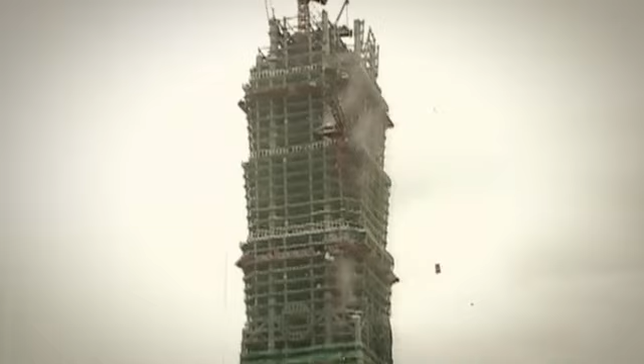This is Taipei 101. Taiwan's record-breaking skyscraper. Incredibly, it's 1/3 taller than the Empire State Building, and cost $1.75 billion to build. But Taipei 101 not only stands in a typhoon hotspot, but right beside an active earthquake fault line. It couldn't exist without the surprising engineering connections hidden deep within its design.

A racing yacht. I can't believe the speed of this thing. A birdcage. That didn't last long at all. A steam pump. A safety belt. And a sports car. So, what's all that got to do with one of the world's tallest buildings? We're about to find out.

I'm on a journey to explore some of the inspirations behind Taiwan's extraordinary skyscraper. In 2004, Taipei 101 topped the record books, reaching 509 meters. Everything to do with Taipei 101 is big. Very, very big, whichever way you look at it. But what made modern skyscrapers like Taipei 101 possible? Bizarrely, inspiration is thought to have come from a birdcage.

Less than 5 generations ago, skyscrapers like these weren't possible. Engineers feared really tall wood and masonry structures would collapse under their own weight. So the question is, who thought of making buildings with metal frames, and why?

Rewind to Chicago, 1871. The city is on fire. The inferno rages for 36 hours, killing over 300 people and destroying 17,500 buildings. The ruins reveal the cause. 3 months of drought turn the timber buildings into tinder boxes. As a result, the city bans wood construction. But Chicago continues to grow fast. And with land at a premium, architects search for new ways to build tall.

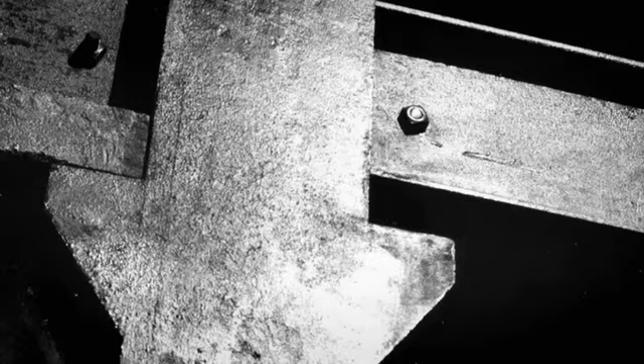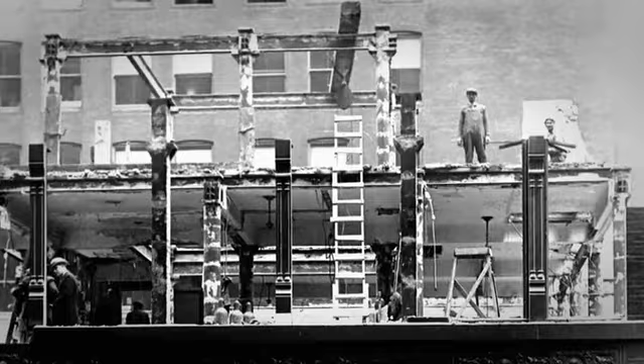Today, it may seem like any bird brain could come up with the idea of building with metal frames, but Jenney's innovation was inspired. He realized that if he bolted horizontal beams to the upright columns and transferred the dead weight of the walls to a metal framework, he'd create not only a lighter structure, but one strong enough to support multiple stories, one on top of another. I want to see for myself the kind of forces that a cage braced with beams can withstand.

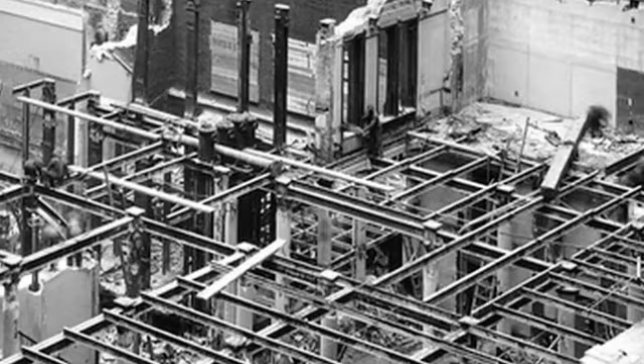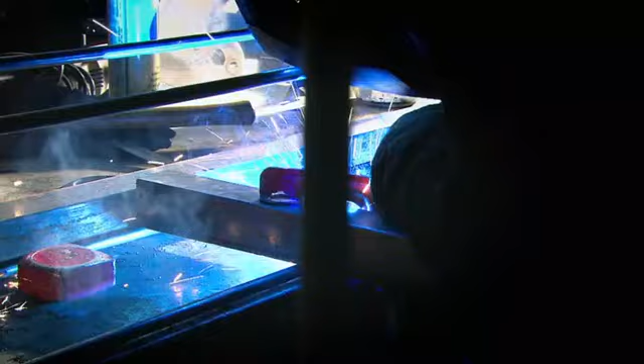So I need some cages that I can test. In order to find out just what a brainwave LeBaron Jenney's idea was, I've come to a workshop that has, amongst other things, a 25-ton crusher on hand. Say these represent LeBaron Jenney's columns. What I want to do is see how much vertical load they can take. That's weight to you and me. First without, and then with bracing.

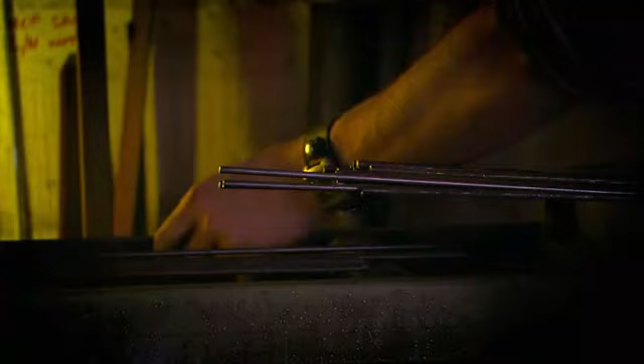Structural engineer Brenda Marsh has set up an experiment to find out how much downforce it'll take to crush my metal towers. So, Brenda, I know this is all about sort of bracing or beams, but how are we going to show that? How's it going to work? Yeah, what we're going to do is take this sample here that has some columns with no beams in it whatsoever, and we're gonna stick it in a press over there until it breaks.

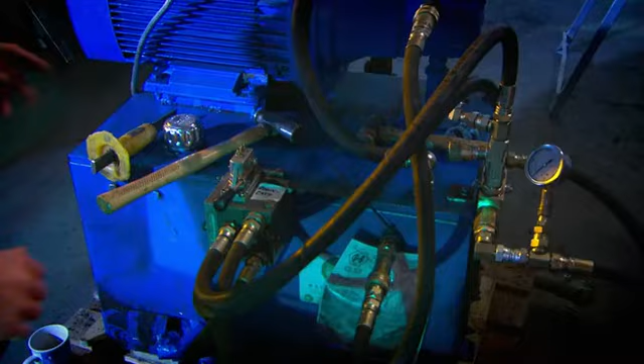What am I doing? You're gonna operate the machine. OK, that's a mistake. Right, I'll do that. You better put that in the business end of it. Okay. So I need to lift the ram thing up. Apparently it's this lever. Okay, now what I want you to do, Richard, is lower the plate down a little bit. Don't apply the pressure yet. There you go. Okay, stop. We need to put some safety goggles on. Oh, OK. Of course we do. Make sure we're at a safe distance. That'll protect us. Right, so here comes your vertical loading. Okay. Applying it now.

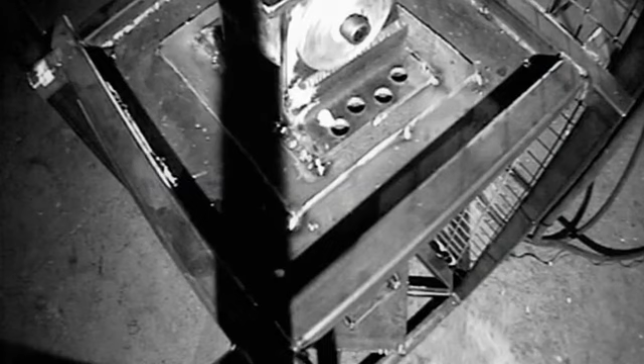The crusher can exert 23 tons of downward force, the weight of a locomotive. Oh, there we go. Hang on, you can see it's going. The columns are starting to buckle. There we go. The whole thing's starting to sway now. You can see. It's completely... Fantastic. Look at that. And that's gone. That didn't last long at all. Almost immediately, the tower gives way. And that's it. It's failed.

This is what worried the early engineers, a structure like a skyscraper collapsing under its own weight. That would be bad in a building, wouldn't it? That would be very bad. We design buildings so they don't do that. OK. Right. We're all set to do that again? Yes.

With structure number 2. Now, this is the new one. I can see, yes, it's got more bits on it, but what are the key points? What makes it so special? Right. What we've done on this one is we've taken what we had in the original structure, so that's these 4 columns, and we've added in some beams here.

The original structure, when it failed, the columns tended to bend outward. So what we want to do is hold those in place to stiffen up the columns. So that means they're all 4 working together then, effectively, rather than bending and bowing. Yes. OK. We've got extra bits on as well. What are these bits?

What we've done is in an original building, you would have walls or something else that keep everything in place. So we're simulating that in this structure with the cross bracing. OK, so for the purposes of this experiment, then, this is the important bit, these beams across here. Can Jenny's tiny horizontal beams help the tower withstand any greater downforce?

The crusher piles on the pressure. It's just like adding multiple stories to a tower as you build taller and taller. 25. That's going. Oh, there we go. Started to buckle. I've broken your clever one. You have done. But it did a lot better. I mean, it was 2.5 times stronger.

And that's exactly what we wanted to show, is that you brace off the columns and it can take a whole lot more load. Can I say something, though? Because instinct tells me now, tie it together, it'll work. Why? Well, it's obvious now because we've seen it. It happens all the time. But before anyone ever thought of it, it's not the obvious solution.

Using his inspired idea, LeBaron Jenney builds the first modern skyscraper. The Chicago Home Insurance Building, completed in 1885, supports its entire 10 stories on a metal frame. So, thanks to a bird cage and some smart thinking, the great-great-grandfather of this monster tower was born. That's how the structural engineers could build this and all its record-breaking 101 floors. But it's more remarkable than just scale.

This giant stands right beside an earthquake fault line and in one of the world's most active typhoon zones. Not an ideal spot for a megatower. Taipei 101 is the world's tallest building under such extreme threat from tropical storms and seismic activity. So how do you build a structure that can cope with wild winds and earthquakes? And what's that got to do with bamboo and sailboats?

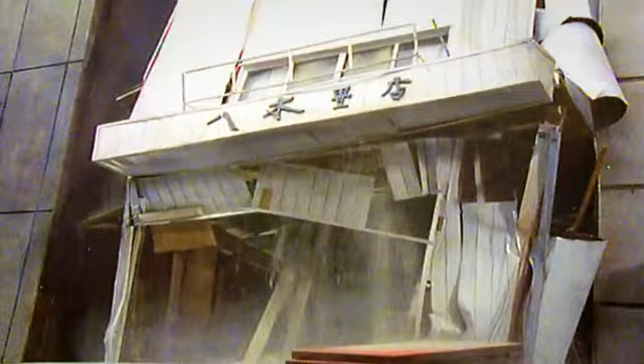Building a 101-story skyscraper on the same fault line should be a recipe for disaster. The designers have to find a solution. Tests in earthquake simulators reveal that a building must be strong and yet flexible to avoid collapse in a quake. This is the contradiction that Taipei 101's engineers must overcome.

When you build one of the tallest structures in the world in the middle of a notorious earthquake hotspot, how do you make it strong enough to stay standing, but flexible enough to withstand the potentially disastrous effects of a seismic shock? The award-winning Taiwanese architect of Taipei 101, C.P. Wang, found inspiration for his solution in nature. Specifically, his nation's long-standing connections with bamboo.

Well, CP, what can possibly be the connection between an immense structure like Taipei 101 and bamboo? I mean, it's not made of bamboo, is it? No, it's not made of bamboo, of course, but in a lot of ways, it's like bamboo. How? I think bamboo is a plant that doesn't look very strong, but it has this elastic nature. It may bend a little bit, but it doesn't break.

Bamboo is a giant, fast-growing grass. The secret of its strength and flexibility is its internal shape. Bamboo grows in hollow, jointed sections, like a series of solid-ended tubes. These are separated by partitions that help reinforce the stem.

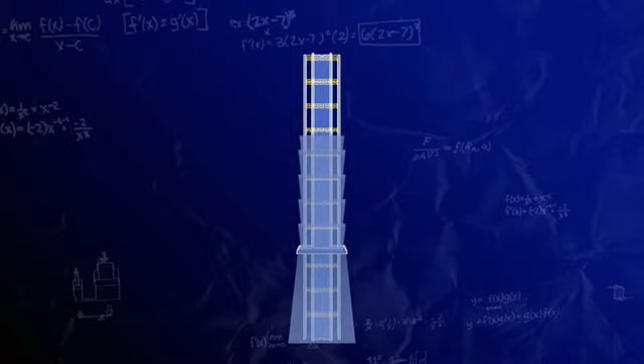Inspired by nature's solution, Wang designs giant steel trusses to connect across the columns at every 8th floor on Taipei 101. This bamboo-inspired design must meet strict seismic targets. The owners required Taipei 101 to withstand the most powerful earthquake expected to hit the city within a 2,500-year cycle. But nature tests C.P. Wang's design even before it's complete.

In 2002, an earthquake strikes. Shockwaves tear across the island. Taipei 101 shakes violently. Anything not firmly attached crashes to the streets below. Dislodged construction cranes tragically take 5 lives. But Taipei 101 stands firm and construction resumes. 2 years later, the completed megatower is crowned the world's tallest building.

But by designing a structure to withstand quakes, Wang creates a new challenge. Tall buildings sway in high winds and even risk collapse in extreme storms. And Taipei 101 is no exception. In fact, it's not just windy, it's smack bang in the middle of a typhoon hotspot. Typhoons, Asian hurricanes, can batter Taiwan 3 or 4 times a year. In 2007, 160-kilometer winds kill 9 and cause $100 million of destruction.

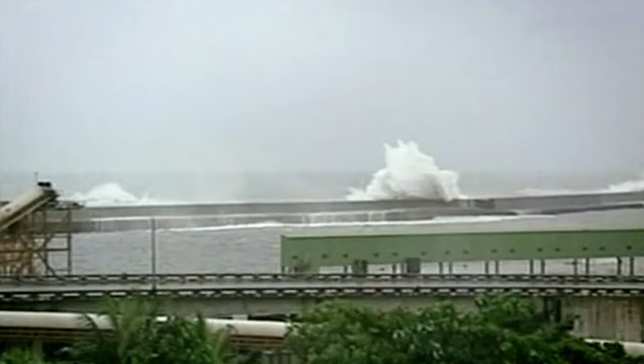To keep Taipei 101 standing in a superstorm, C.P. Wang turns to an engineering solution developed 3,500 years ago. To discover this ancient engineering secret, I'm meeting Ken Maschke from the company that helped design Taipei 101. Ken wants me to try sailing, but not in an ordinary sailboat.

Ken. Hey, Richard. Hi, how you doing? Come on board.

It's narrow, light, and has no keel sticking down into the water for stability. So how can it stay upright against the wind? This extra hull, one of two, is the engineering connection this craft shares with Taipei 101, and why Ken's got me on a sailboat. Now it's got me working. These clever devices are called outriggers. There it goes. They keep a sailboat stable in high winds. Look at that.

Before we hoist sail, Ken explains the basic principle of the outriggers. If you stand with your feet together and I shove on you, you're likely to fall over. If you spread your legs, it's going to be a lot tougher. Now, the same thing, in essence, is what we've done here. We spread out the distance between which the force acts. The idea of outriggers goes back 3,500 years to the Polynesians. Using them meant the early mariners could paddle or sail fast and stay stable.

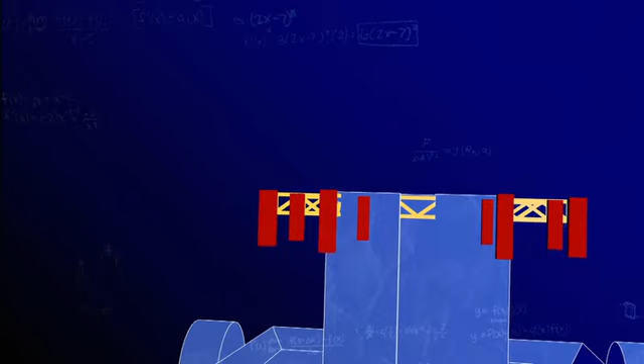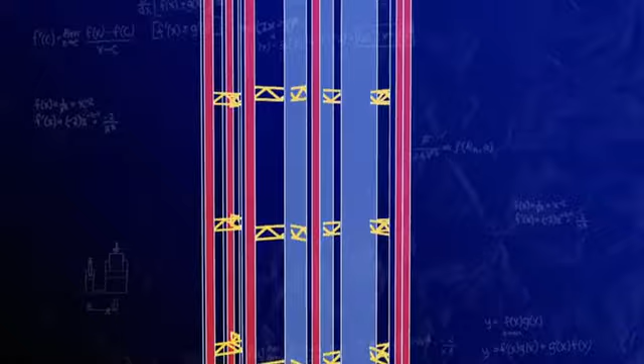I can see how these outriggers work on a boat, but the same theory on a building. How? The outriggers are part of the wind-resisting system, which includes a central core that's very stiff, but not stiff enough by itself. So we add these outrigger trusses to transfer force out to the exterior columns, like the pontoon that you're standing on right now. We can take the outrigger idea and apply it all the way up the building. So actually in Taipei 101, we have outriggers every 8 floors.

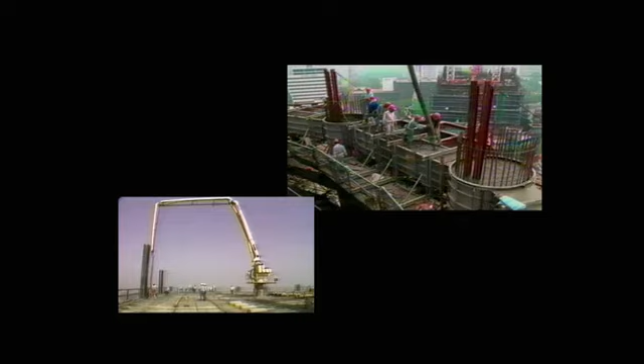With a building as big as Taipei 101, every structural challenge is supersized, especially when working with the construction world's favorite material, concrete. Every floor on Taipei 101, including the 101st, is concrete. To pump concrete that high requires a super pump that has its origins in the 18th century.

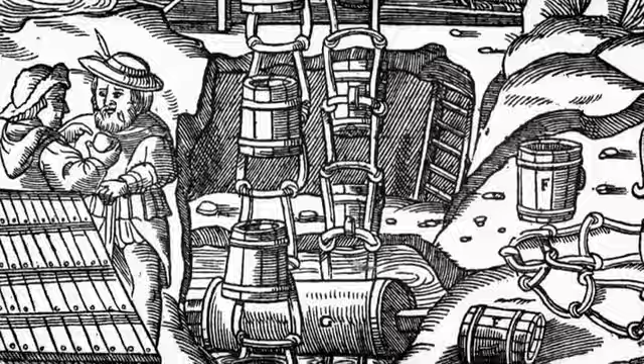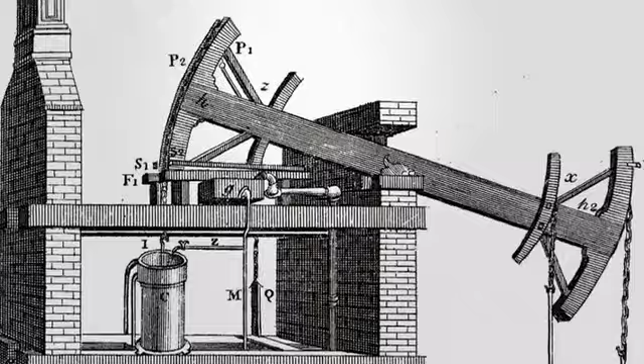Rewind 300 years. The English mining industry is in trouble. The deep mines are flooding, and the man and horse-powered pumps available can't drain water fast enough. The mines are going under. Inside this modest building sits the machine that saved the day and kicked off the Industrial Revolution. It is the result of a stroke of genius from an inventive preacher and ironmonger, Thomas Newcomen.

This is Newcomen's Nodding Donkey, the first piston-powered pump, and the first really practical engine for pumping water. Newcomen's idea was to harness the power of the pressure difference created by a vacuum. He used it to move a piston. It works on the vacuum created by the steam when it's condensed. It works on the principle that steam occupies, say, this much space, but when you cool it and turn it back to water, it occupies a fraction of that space.

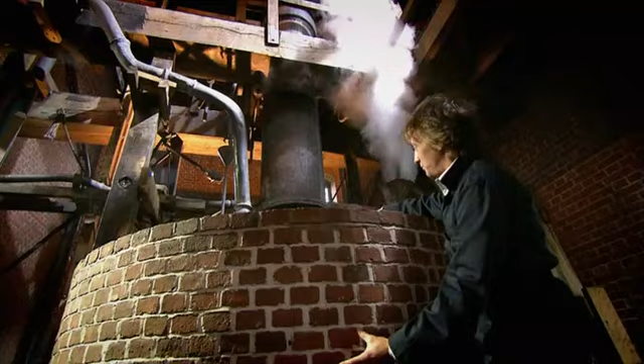So under here is the water, the tank, and under that is the heat. Heating it up in the boiler as steam up into that big cylinder, which is the piston. That pipe goes in to the bottom of the piston, sends the cold water in, that condenses the steam, and suddenly that huge volume of steam is reduced to just a tiny volume of water.

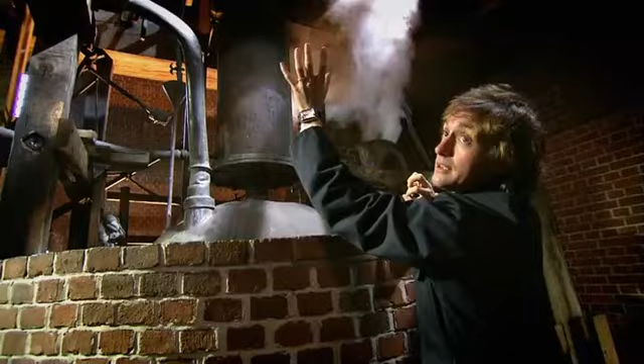And then atmospheric pressure outside on top of the piston is greater than the pressure inside, and it's got no choice. The piston has to come down, drawing the beam that way to do its work. Then it's counterbalanced, so it just pulls the piston back up to the top. More steam in, condenses it again, draws it back down. They were very clever.

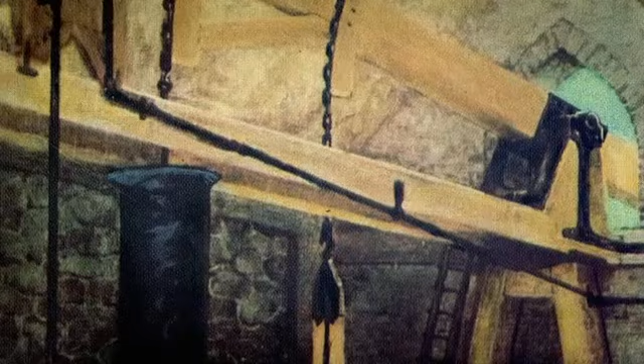Throughout the rest of the 18th century, Newcomen's invention drains countless mines, helping fuel the Industrial Revolution. 24 years after his death, in 1753, the first Newcomen-style pump crosses the Atlantic to begin draining a copper mine in New Jersey.

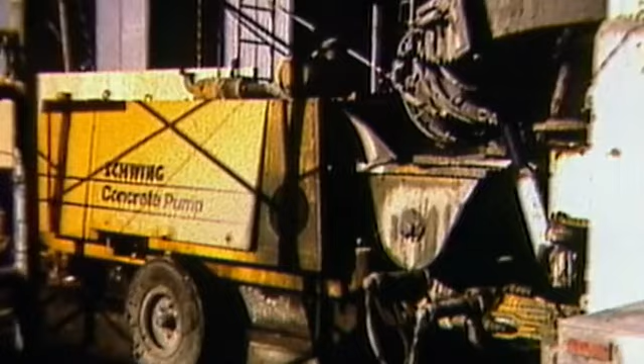Fast forward 2.5 centuries to the offspring of Newcomen's engine. These powerful piston pumps use a vacuum and mega pressures to deliver concrete skyward and into the record books. In August 2003, a world record was broken, just up there. It was the highest anyone had ever pumped concrete on a building. It had to be raised 101 floors from down there. A pipe filled with concrete this high weighs well over 13 tons, and pumping it takes technology Newcomen could only dream about.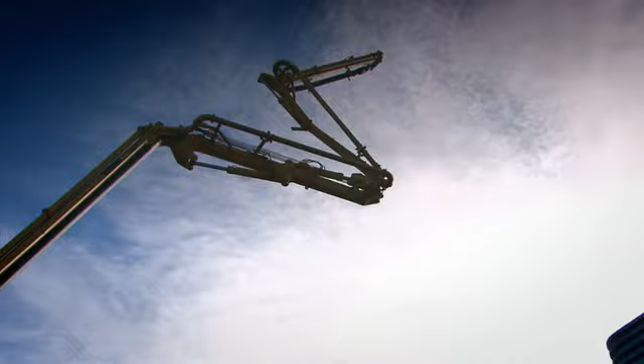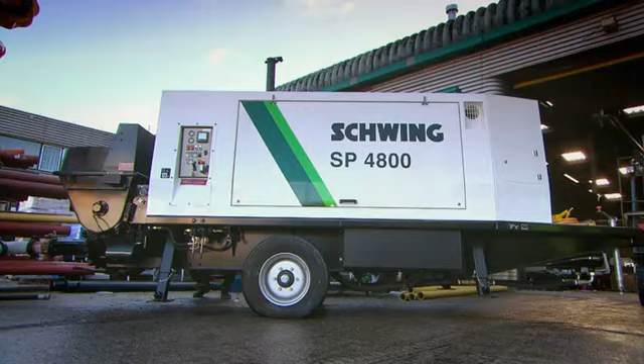Pumping concrete is big business, and as buildings get higher, the technology to power it to the top gets more sophisticated. This is the business end of a pipe network that extended over 440 meters that way. A chain of interconnected pipes stretch to reach the high floors. On Taipei 101, the pump sits near the base of the building, and the rooftop lies 4.5 football fields above. The concrete is kept flowing by a super pump.

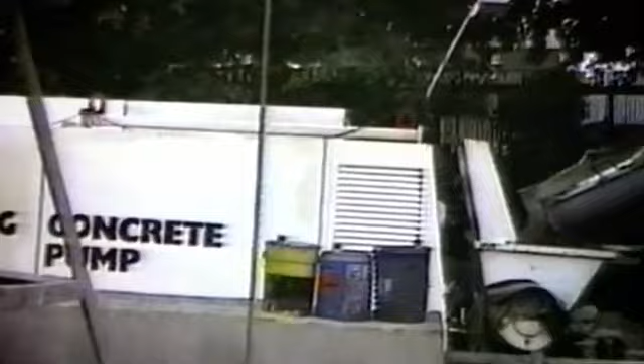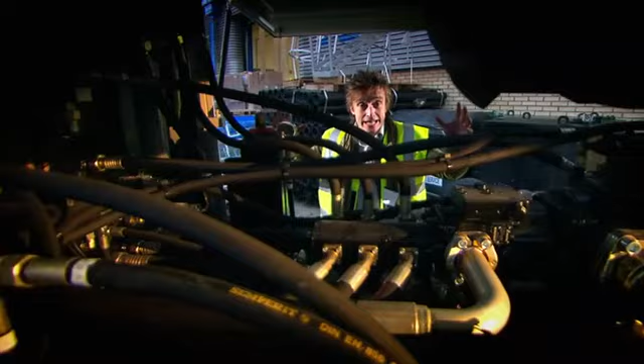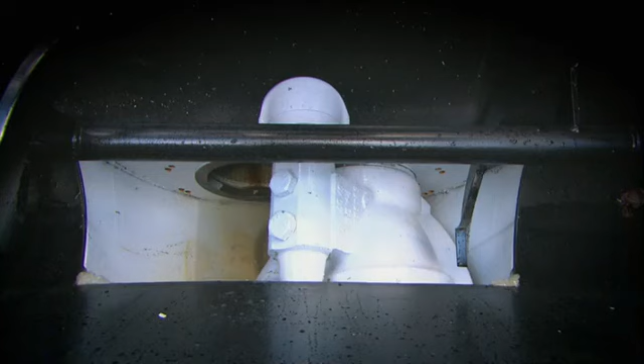Meet the 12-cylinder, 419-kilowatt Deutz diesel engine. This is the heart of the operation. Literally, it's the pump that keeps the construction alive. The moving parts in here made it possible to pump the concrete even to the highest floors. A column of concrete must be kept flowing, or the mix will separate, or even worse, set. To keep a constant flow, the pump operates 2 pistons. One sucks while the other blows.

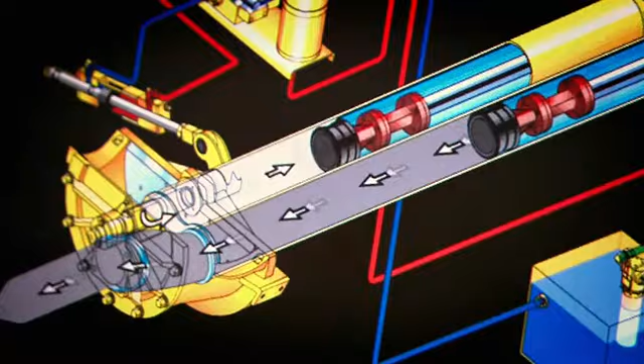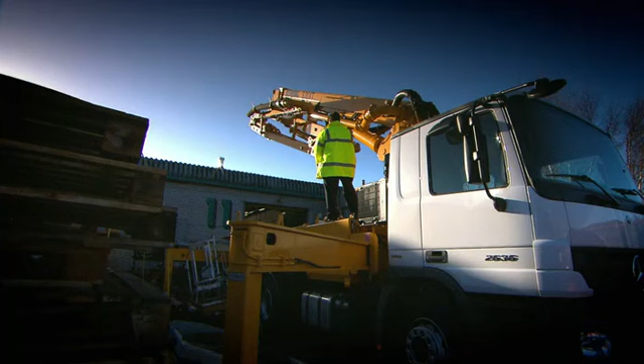A simple vacuum, like Newcomen's, pulls the liquid concrete in. Then the huge diesel engine generates hydraulic pressure to push it out. It's Newcomen's ideas, just hundreds of times more pressure for a much weightier task. I want to see what kind of pressures the Taipei 101 pumping world record used. So pump specialist Phil Suri devises a pressure demo that will blast my weight in concrete.

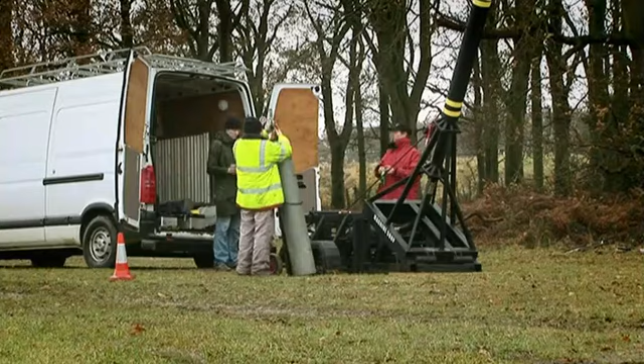It's difficult to get your head around the kind of power and pressure that modern pumps can generate using those old techniques. So rather than just talk numbers about it all, we've come up with a rather clever way of demonstrating very graphically what that power can do. We're going to use pressure to move some concrete, but we're going to do it in a rather different way. Using a concrete missile as heavy as me, Phil and his team are going to demonstrate what 100 bar of pressure can do.

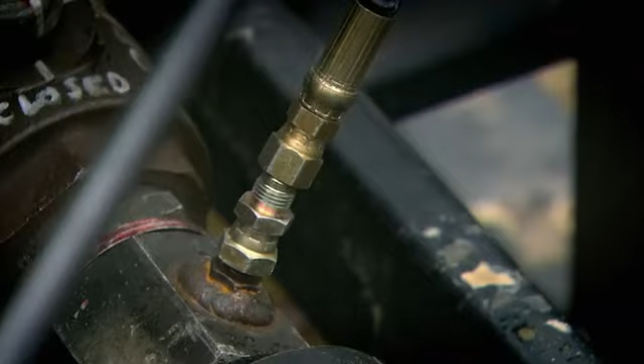1 bar, named after the Greek word for weight, is about 1 kilogram per square centimetre, or roughly the atmospheric pressure all around us. I pump my car tyres to 3 times that, 3 bar, and that seems like a lot. It's a firing cable.

Huh? That's a cable to fire it. That's a trigger. Right. That's what I said. You trip over it. Oh, sorry. I'm sorry.

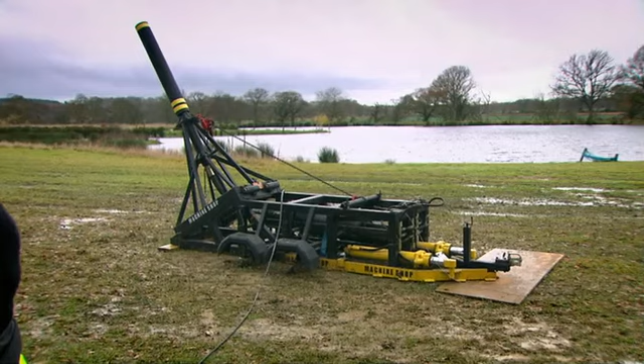But this will give me an idea of what? Of what 100 bar of force is capable of doing. Taipei Tower, the pump that we used there was capable of 200 bar pumping pressure. This is only capable of 100 bar. So your pumps can generate roughly twice the pressure of this. Yeah.

Exactly. And you're just telling me that because you're proud of your pump. Yes, I am. Yes, you are. I am.

This is a first for me, obviously. I've never seen a chunk of concrete my weight fired from a cannon. Phil is keen to see how far his concrete missile will go.

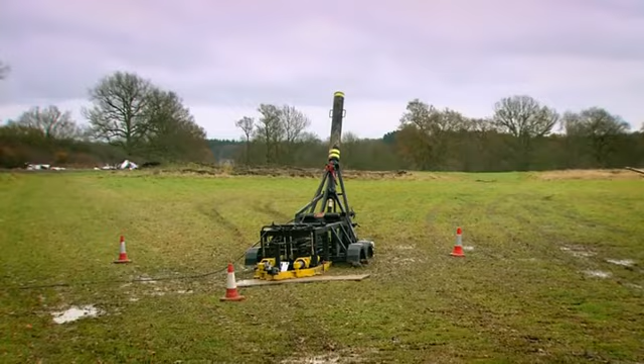The safety team are keen to make sure no one is on the receiving end. Wow. So that's half the pressure on a lump of concrete the same weight as me. Yep. You're what, about 140 pounds? Yeah, 64 kilos, something like that. Okay, like 10 stone, okay. We've got to go and get that thing then. Yeah, let's do it. Crikey.

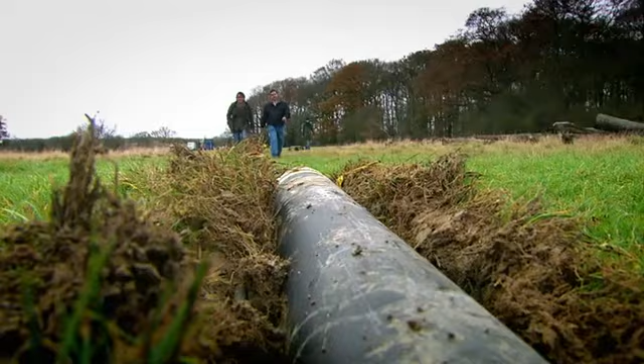The launcher blasts my concrete twin well over 90 meters. The top of Taipei 101 is 4 times that distance, straight up. And the record-breaking concrete column was 220 times heavier than me. I now understand the amazing pressures Phil's pumps achieve, sending concrete to the 101st floor of the Taipei Tower. It's buried itself. It's buried itself, yeah. It's quite impressive, look at it. 106 paces.

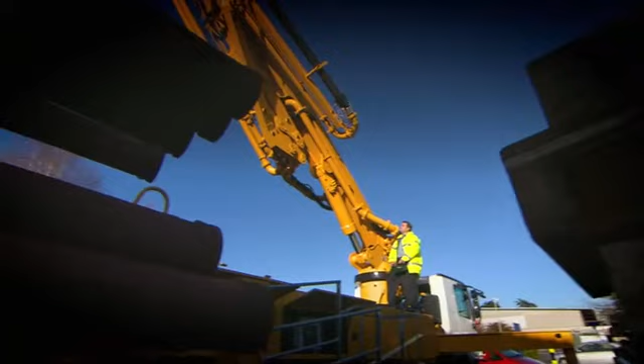The mechanical pump has come a long way from Newcomen's wheezing steam engine. That's how they got concrete to the top. But how do you transport people to such heights safely and quickly? Which brings me to elevators and my next connection.

Whatever type of transport you're using, including elevators, there's a problem with going faster. You've got to be able to stop faster too. Higher speeds mean more braking loads. More loads mean more heat. So how do you provide a braking system that can work without overheating and risking a fire? And what's that got to do with a sports car?

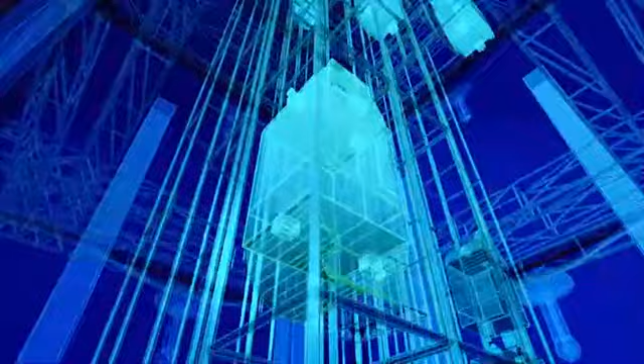Being big and tall like Taipei 101 means lots of elevators. In total, 67 elevators are needed to keep the 10,000 people that Taipei 101 is designed for on the move. 34 are even double-deckers. But for tourists wanting a flying visit to the sky-high viewing gallery, these regular elevators aren't fast enough. The challenge is whisking a visitor like me directly to the 89th floor, super quick, but super safe.

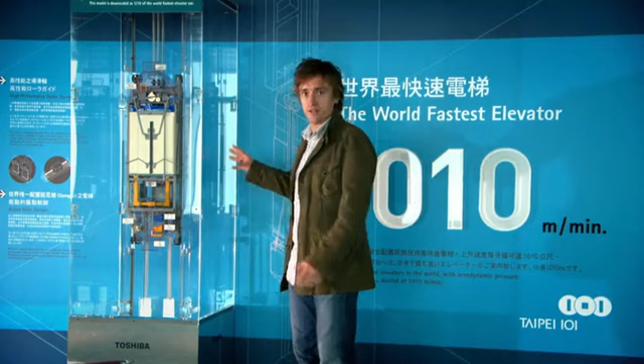This is the answer. The world's most technologically advanced elevator. Well, obviously this is a model. The real thing's bigger, so you can get in it. Digitally controlled, it has a pressurized aerodynamic capsule with shake reduction and even earthquake sensing. The designers say it also goes really fast. I want to know how fast.

This elevator, one of a pair, has been officially certified by the Guinness Book of World Records as the fastest elevator in the world. And they've given it to me to play with. So, they reckon it can do the next 84 floors in 37 seconds. Ellie, when you're ready, if you would, thank you. In your own time, go. As soon as we start moving, I'll start the clock. Go. I think we've started moving. There's no noise.

There's a fan. Apparently the whole lift is pressurized like an aircraft to help stop your ears from popping. Talking of aircraft, this actually accelerates vertically more rapidly than a commercial passenger airliner taking off. And my ears are now popping. Right, we're 20 seconds in, 25. There's no sense that we're going faster than the city speed limit. We're breaking the speed limit. If we did this horizontally through the streets, we'd be in trouble. There's no noise. And that's it. That was under 37 seconds, and this is the top.

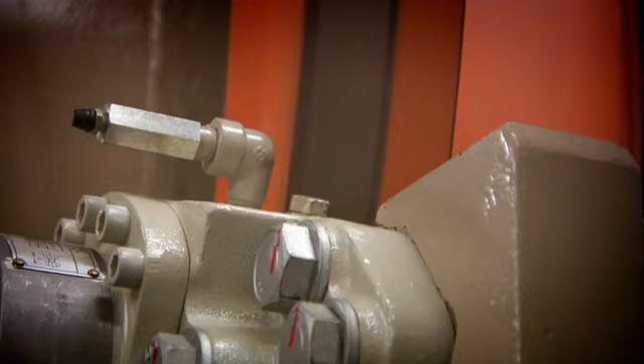The high-speed elevator launched me at over 60 kilometers an hour, almost half a kilometer into the sky. It's a long way up and a frighteningly long way down. If the elevator cables give way, it's an 84-floor drop with only the emergency brakes between you and the basement. In extreme events like this, metal brakes overheat and can fail. To hold Taipei 101's super elevators, the engineers needed a material that performs consistently, even when things get seriously hot. It's an engineering line of thought that owes a lot to the automotive industry.

This is a high-performance Porsche Boxster S and my next connection. Porsche was one of the first car companies to experiment with alternatives to metal brake discs. The material that performed consistently at extreme temperatures was ceramic. Their tests report the ceramic disc brakes don't get as hot as metal and can even grip better the hotter they get. I want to check out the difference in performance between metal and ceramic brake discs for myself.

So I'm meeting Craig Dawson, a motorsport engineering expert. So, Craig, what are you doing? Well, basically, I'm trying to get a benchmark for both the disc temperatures at the moment on the two cars. These two cars are completely identical in every way, apart from the brakes. That's correct. The yellow car has a traditional cast iron disc, like every modern-day road car. The red car has what is known as a ceramic disc.

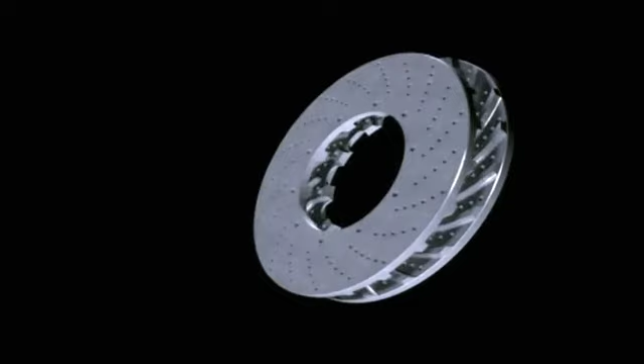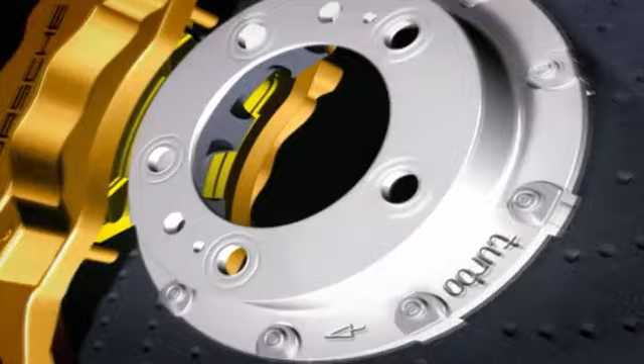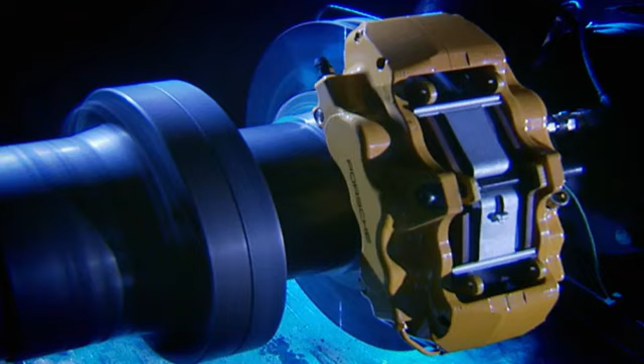The ceramic compound that makes up these brake discs is usually silicon carbide or silicon nitride. It's baked at extremely high temperatures to form a heat-resistant material. Why is heat such an issue in brake discs? Well, with a cast iron disc, it can get to the point where it gets too hot. It begins to not work as well. The friction that it actually produces goes down. So the pads can't grip as well on the disc and it doesn't work as well once there's too much heat. That's absolutely right.

And there's double trouble when metal brakes overheat. Not only do they stop gripping as well, but if they fail to dissipate the heat, they can set fire to what's around them, as this very extreme example from the world of motor racing shows. We have flames! Not good for emergency brakes in an out-of-control elevator.

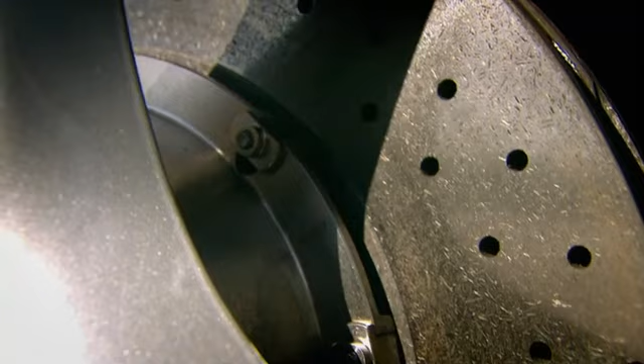Almost the opposite applies with the ceramic brakes. It needs heat to get them to work in the first place, but they can go to a higher temperature as well. So how are we, with just these two cars, going to show all of that? Well, basically, you're going to perform a series of repeated stops, which are going to build the brake temperature up. Here I go. 5 laps. The first test, drive very fast, then hard on the brakes 20 times over 5 laps. Reckon I can manage that.

The idea is to build up the brake temperature so I can feel if their performance changes as the heat increases. To gauge the temperature, we're using a camera that turns heat into visible light. The reds are hotter than the blue colours. White means it's getting serious. Craig also wants to see how quickly they lose their heat. A lack of heat loss is what can build catastrophic temperatures in metal discs. I can smell brakes. I don't know if that's good scientifically.

627. OK. When I pull in, Craig immediately checks the surface temperature of each brake disc. The readings on the front discs are well over 600 degrees centigrade. They're still functional, but as hot as the inside of a jet engine. 290. Craig will take a further series of readings to check the rate of cooling. Thinking back, the brakes did begin to feel different once they'd got very hot, but still perfectly safe.

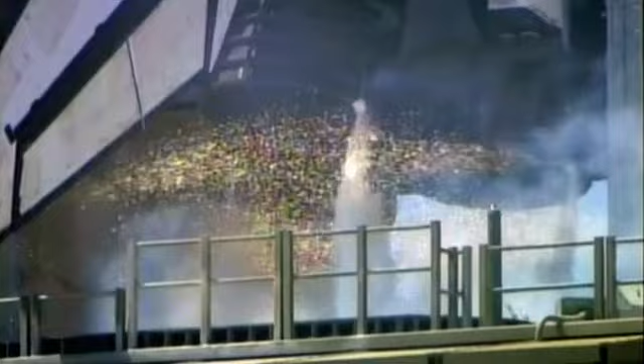This concept of using fireproof and heat-resistant ceramics for vehicles took off last century. Rewind to 1981. The first flight of NASA's shuttle is the culmination of a decade of research into heat-resistant materials. The problem is protecting the craft from re-entry temperatures capable of melting the aluminium body.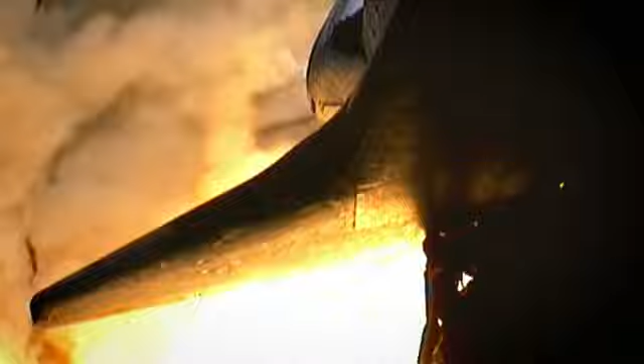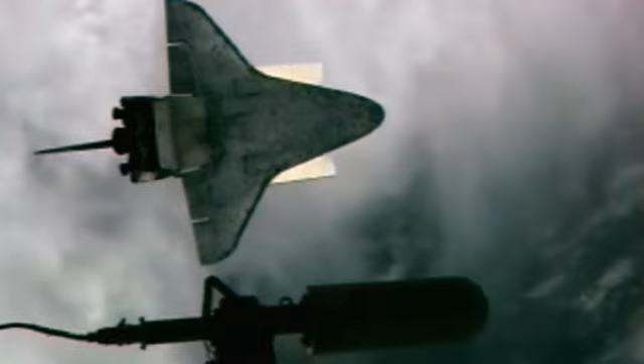Using a compound based on sand, aerospace engineers Lockheed Martin develop a new silica ceramic insulation. This forms the basis of the shuttle's heat tiles. A ceramic tile can heat to over 648 degrees centigrade on one side and stay cool enough to touch on the other. In really extreme situations, the tiles can withstand temperatures of over 1600 degrees centigrade. That's hot enough to melt rock.

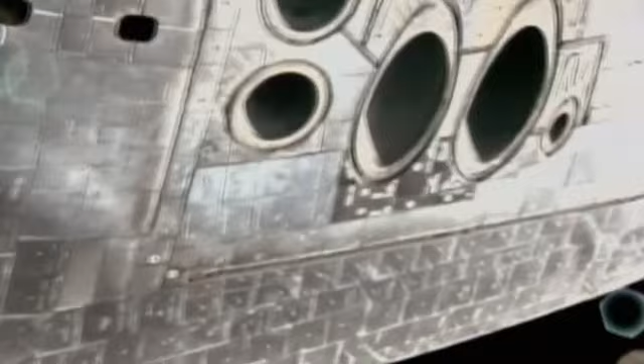Heat-resistant ceramics are now well and truly proven, with their origins in rocket science and a track record in performance car brakes. On Taipei 101, they are the engineer's choice for brakes to halt a runaway high-speed elevator. This is mission control for Taipei 101, where they monitor everything and everyone. One full section just monitors all the elevators, including the state-of-the-art ceramic emergency brakes.

Should the cable snap on the high-speed elevator, the emergency brakes will activate. 2 silicon nitride ceramic pads will grip a steel safety runner. The pads will withstand almost 1,000 degrees centigrade. That's as hot as molten lava. The elevator brakes will hold 22 tons, speeding at 76.5 kilometers, within 40 meters, less than half a football field, thanks to ceramics. And that's what connects a sports car with stopping the fastest elevators in the world.

But for me, the most surprising thing about Taipei 101 connects your car's seatbelts with stopping diners up on the 85th floor spilling their soup when the high winds hit. The threat of tropical storms hangs over Taipei 101. It's not fear of collapse, but a delicate issue of customer comfort. The typhoons that blast through the city of Taipei mean driving rain and 160km/h winds slam against Taipei 101, and it feels it. You see, a tall building like this is prone to bend in the wind. Remember the bamboo, flexibility and all that.

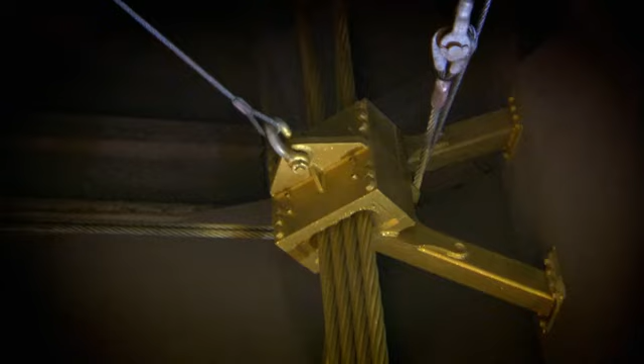This is how. The world's largest and heaviest damper, suspended between the 92nd and 87th floors on 16 huge steel cables. Heavier than 3 jumbo jets, the giant ball will swing like a pendulum. The swinging counteracts the building's sway. It uses a property that all objects have. It's called inertia. If something is stationary, it wants to stay still. If it's moving, it wants to carry on. The desire of an object to keep doing what it's doing is inertia at work.

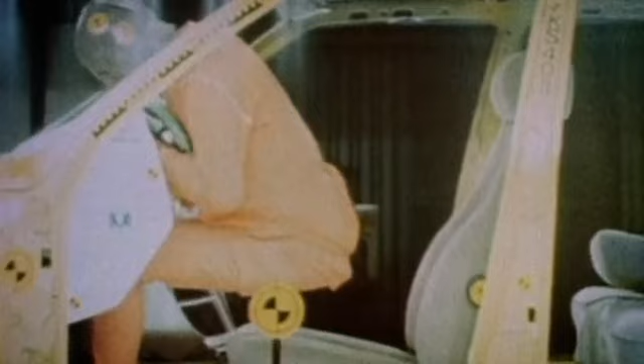Back in the 1950s, a researcher at Cornell University encountered the destructive side of inertia. His name was Hugh de Haven. After surviving a serious air crash, de Haven was motivated to study collisions. As surprising as it may sound today, back then, the common belief was that you were better off being thrown free in a car crash. De Haven realized the damage was done as passengers fly loose and impact their surroundings, and that inertia was the culprit. But restraining them would protect them.

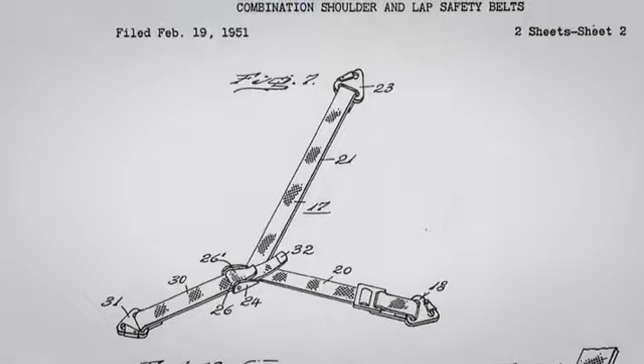In 1951, Hugh de Haven files a patent for the 3-point seatbelt, and car passenger safety leaps forwards. 2 decades later, the inertia reel safety belt is introduced, initially by Volvo and Ford. It leaves you free to move around, only locking under sudden movements. It uses the very same property of inertia that Hugh de Haven realized caused injury.

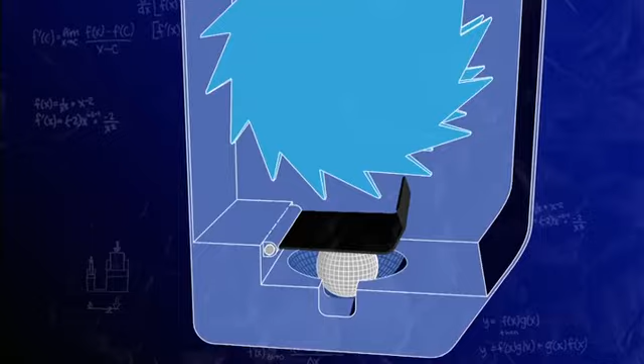Inside an inertia seatbelt sits a heavy steel ball. When a car is in a collision, the inertia of the ball means it will move independently. The moving ball hits an arm that pushes up and triggers a process that locks the belt.

Inertia is also harnessed in the giant 600-ton steel ball suspended at the top of Taipei 101. When the building sways, it swings like a giant pendulum. It then pushes against oil-filled shock absorbers or dampers that dissipate the sway.

I want to check out the damper for myself, so I have permission to go into a construction area underneath it. It feels a bit like caving, except I'm in a tunnel over 80 stories up. Wow. Here it is, the heart of it. 6 meters in diameter and made up of 41 separate steel plates.

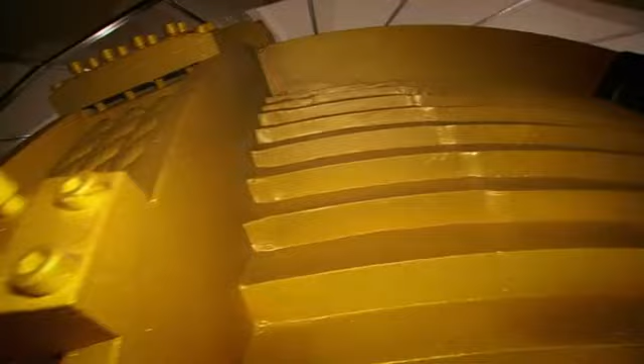Only now do I get a sense of what a radical and inspired idea it is. Suddenly, now I see it, I understand much better about how it works. This massive ball, this weight, sits here in the middle of the building, and as the building starts to move, at first the ball resists that movement. Then it starts to move, but that's where these come into play.

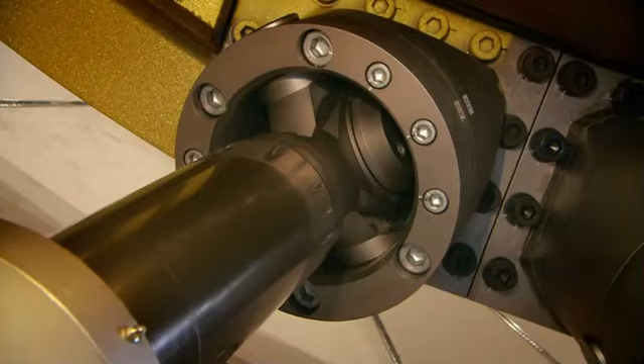And they're kind of like the shock absorbers on your car, only massive. And as the ball moves, these absorb the energy, they soak it up. And all of this is happening with hundreds of tons of steel swinging about, 80, 90 stories up.

C.P. Wang, the architect of Taipei 101, has his own demo of the damper at work. So I went to meet him at the top of his award-winning building. When wind hits, the building really moves. Yeah. And it starts doing all that for a long time. It makes people uncomfortable working in the building. So what we have designed is this.

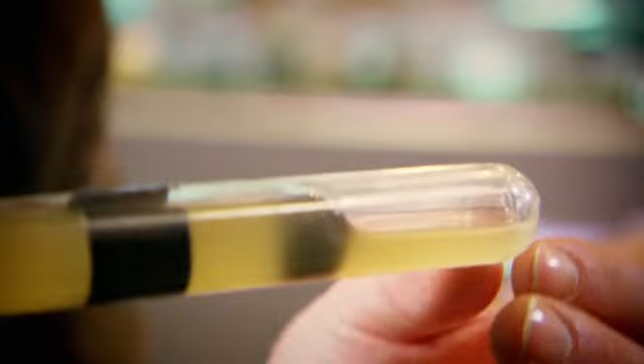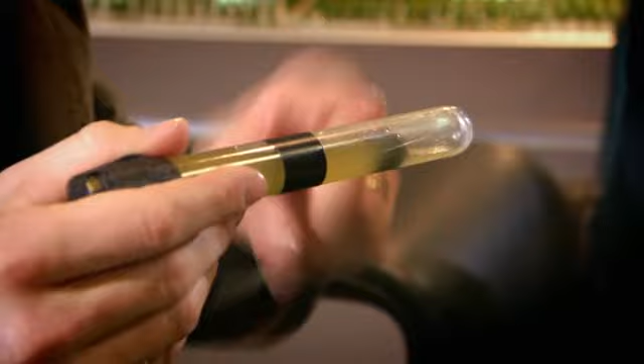If you would please take that down. Okay. Replace this with this. Yeah, the purpose is to make the ball the same. This is our damper, actually the heart of the building. Wang explains his metal ball in this demonstration is in an oil-filled tube. This best represents the oil-filled shock absorbers attached to the giant damper.

So I'll put that in. So this is now with your damper in. Now the wind is blowing again, and wow. So it doesn't stop it moving, but once it started moving, it takes the violence out of the movement. It doesn't accelerate or slow down as quickly. It's a more gentle feeling.

I suppose what it's doing is giving you a better ride up here, isn't it? Buildings are for people to use. So if we cannot make the people comfortable, we don't have a good building.

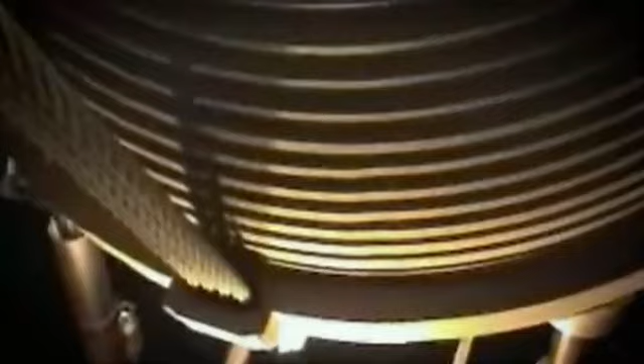On the 3rd of October 2005, Typhoon Long Wang blasts hurricane-force winds across Taiwan and presents the damper system with its first serious test. This film shows the ball in action as the 110 km/h winds blow that day. As it begins to swing, the giant oil-filled cylinders take up the energy from 500 tons of swinging steel.

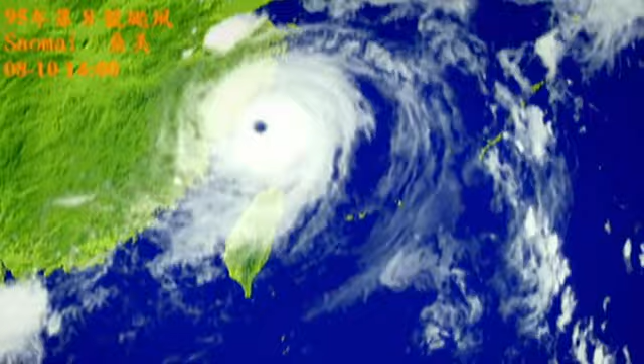This extraordinary footage, filmed on a cell phone, reveals the ball damping 545,000 tons of skyscraper as she sways in the typhoon. After 3 hours, the winds abate, leaving Taipei 101 to face another day. So, thanks to scientists from the past understanding inertia, today anyone can enjoy soup in a storm at the top of one of the world's tallest buildings.

Looking down, watching the bustle of daily life on Taipei's city streets, it's hard to comprehend the incredible feats of design and engineering that went into making this extraordinary tower possible. Taipei 101 reaches skyward thanks to a birdcage. It's built to beat earthquake and typhoon with inspiration from bamboo and ancient outriggers.

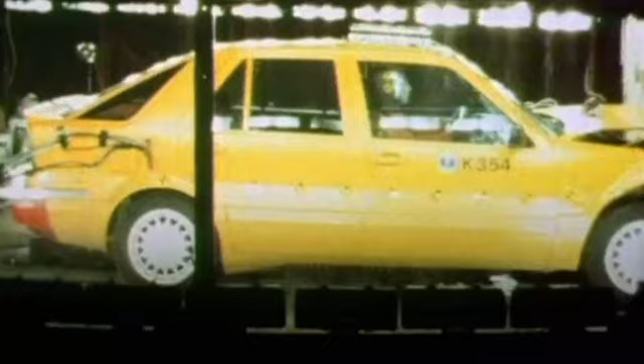It uses Industrial Revolution-style piston power for world record concrete pumping. It calls on high-tech ceramics to stop the world's fastest elevators. And is inspired by the inertia seatbelt to have storm-beating stability. Taipei 101's exceptional engineering connections mean Taiwan's record-breaking tower is one of the modern world's most spectacular construction icons. From down here, there's just no getting away from the size, the sheer presence of Taipei 101.

Now, where's my moped? There was a grey one like that, but not... No, that's... Excuse me, is that... No, that's not mine. Why didn't I get a yellow one I could spot?